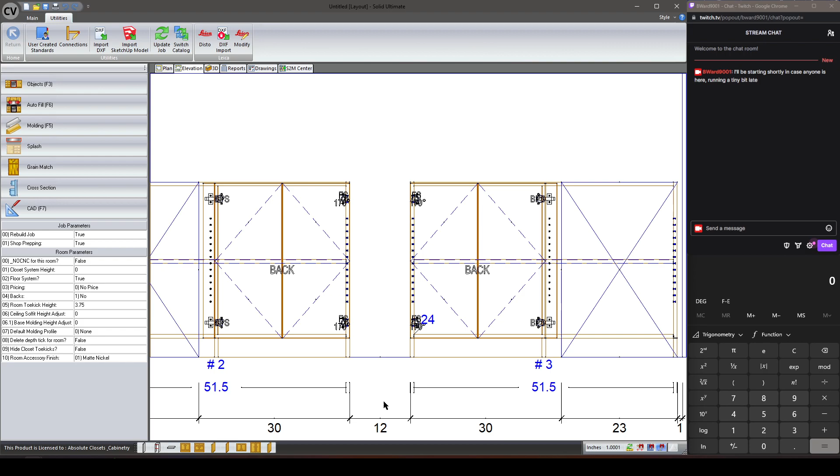The point is that specifically with these cabinets, there are different hinges that need to be used, and in our case, what you're seeing here is a left and a right extended end cabinet. I'm not going to go into how I've built mine. Everybody builds theirs differently, so far as I can tell, which is probably why generally the community seems dissatisfied with what you can get from the assembly wizard or construction wizard questions.

And it seems like everybody needs to modify these in some way to get them to work correctly, and what I have is no different. But I don't want to focus on that for this video because everybody does this so differently. If you have any questions about how I've done this, or want to build your blind cabinets like I build mine, send me a message. I'm more than happy to help. I just don't know that doing a video on the exact way I've built them will be valuable to most people. So anyhow...

This is probably going to be a two-part stream. This one, I think I'm going to focus primarily on how to change the hinges and my process. And the next one, I'm going to probably talk about these kind of hinge annotations that I've got, why I have them, and how you can add them if you want to. I'll go through the process I use to add them.

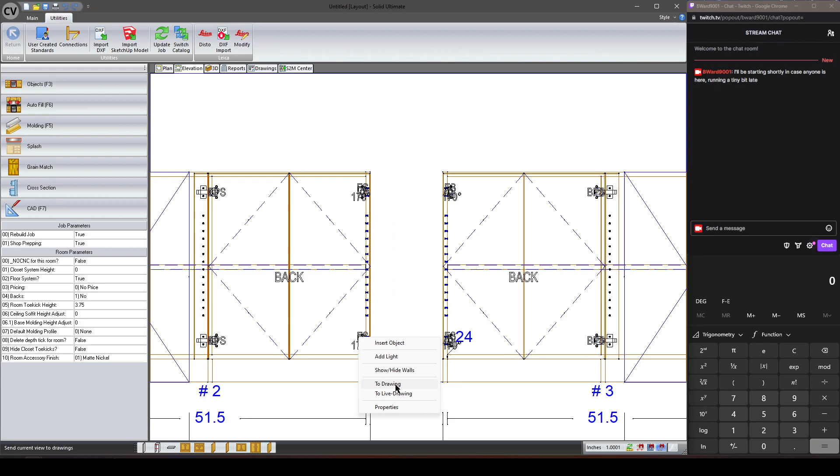But because of the way that we operate specifically, our installers or our assemblers, depending on the situation, have requested that our drawings actually display at each hinge location the specific type of hinge.

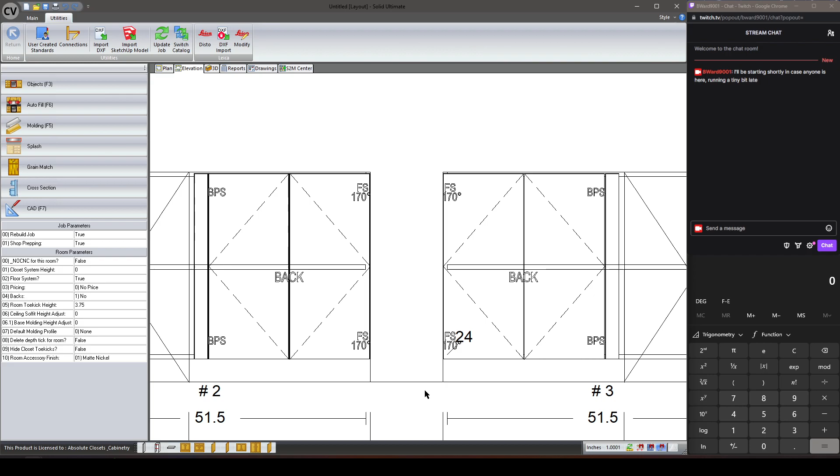Now, whether you agree with this or think this is the best way to go about it doesn't really matter, that's not the point. I would do this differently if it was my shop, but it's not. Because I have to work within the constraints that exist for me, this is a request that was made, and this is my solution. I'd be very surprised if my organization is the only place that requests this type of information.

So anyway, we're not going to talk about the annotations today. We're going to talk about how I've got my hinges changing. Just to show you, this BPS really just stands for blind panel soft close. And then FS 170 is for full overlay soft close 170 degrees.

So when we do our blind corner cabinets and it's a pair of doors, we want the left door on a left extended end or left blind corner cabinet to be the blind panel hinge. And then we want the right door in that pair to open up and swing completely out of the way, because these cabinets are already fairly difficult to utilize. So if you've got one where you're requesting a pair of doors, this right door really needs to get out of the way for there to be any real functionality, or for you to be able to get into it without fighting and eventually damaging your hinges and doors on the right.

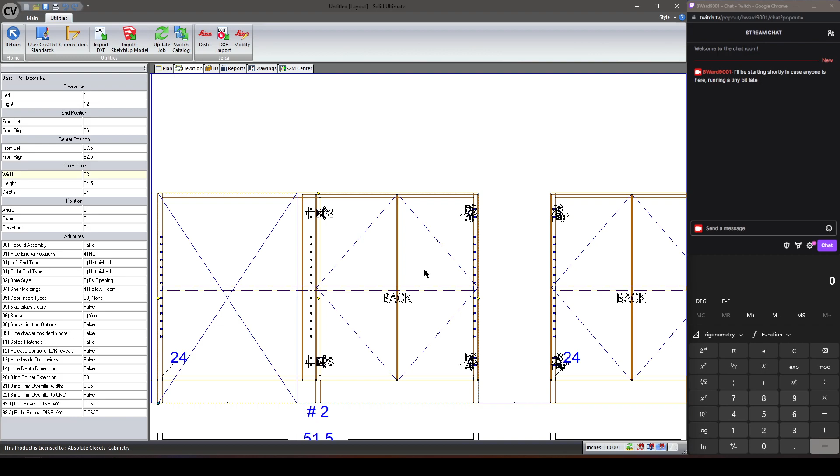So what I want to show is the fact that my hinges for these doors are set to our standard full overlay soft close hinges with standard plates. But I think you'll see it. You can see here in our reports—ignore my massive door pull number if you don't mind—you can see right here that we are actually reporting 170-degree full overlay soft close hinges. Well, the annotation at least is calling it out.

And then the blind panel—these are just called hinge, but when they do report on the reports, they're going to be our blind panel hinge and our 170-degree hinge. So what today's stream is going to be about is how did I manage to do this while leaving this as a pair of doors.

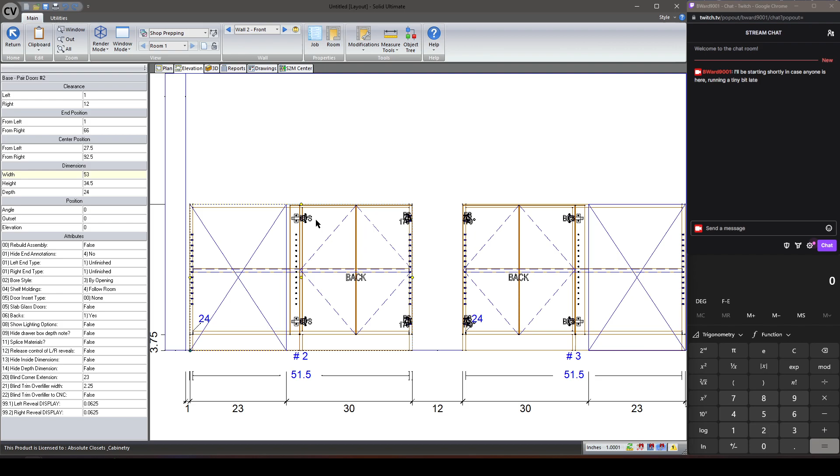And you'll notice, again, it's the blind panel on the left, 170 on the right with the left extended end. And over here with the right extended end, we've got the 170s on the left and the blind panels on the right with a pair of doors again.

Notice if I switch this from a pair of doors to a single door, which if anybody were to build this cabinet, they'd probably get a talking to. But you can see as I switch the hinge side, it does automatically pick the blind panel hinge for the right, the 170-degree for the left when it's a single door, and again, when you go to pair, it's the blind panel on the right and the 170 on the left, depending on your specific condition.

So, I have built a document, and I'm going to provide this. I'm trying to provide a more complete package when I do these videos so that anybody watching will hopefully have a better chance of repeating what I'm showing if they'd like to, or just have a reference to go along with it. And I don't really have a great way today of sharing this, but I'm working on it.

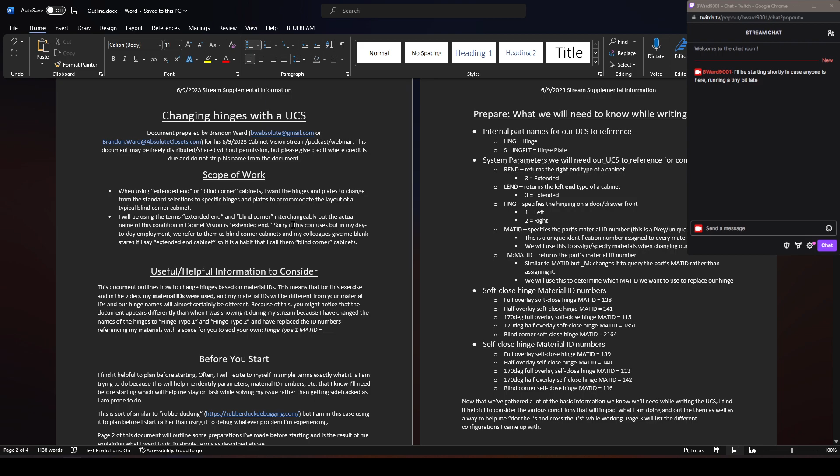So this first page is just some high-level stuff, right? What are we doing? The scope of work. When we're using an extended end or blind corner cabinets, we want the hinges and plates to change from the standard selections to specific hinges for the application.

By the way, I will be using the terms extended end and blind corner interchangeably. Cabinet Vision calls these extended end cabinets. Most of the people I encounter in real life call them blind corner cabinets. So I will be using the terms interchangeably, and I'm sorry if that's confusing. It's just one of those things. So anyhow,

this next section is almost like a disclaimer. As we work through this, we're going to be referencing my system's material ID numbers, and my system's material ID numbers are not going to be the same as yours. So what is important to consider as you watch this video, if you're attempting something similar, is that you need to get your own material IDs from your material manager within Cabinet Vision.

Just because my full overlay soft close hinge material ID is 138 doesn't mean that yours will be that. And you're not going to call it full overlay soft close hinge, I'm sure. You'll probably call it something different based on the needs of your organization. For my workplace, they wanted the report to say full overlay soft close hinge, so that's what it says. But yours might be the actual product number, or whatever you use to refer to your products internally.

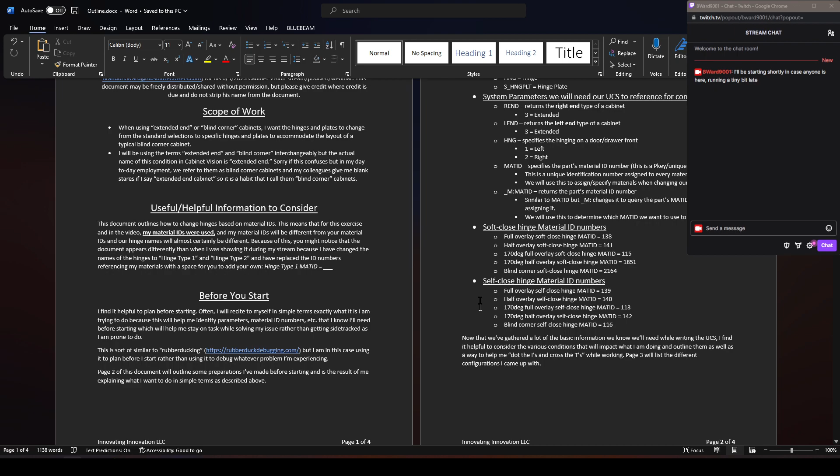So now that I've gathered all of this basic information, I find it's helpful to consider the various conditions that will impact what I'm doing. What are the possible configurations or conditions to consider when I'm writing this UCS?

I know that I'm going to have left and right extended ends, and then conditions where there's a pair of doors or just a left door only on my left extended ends. My right extended ends will have a pair of doors, which will be left and right doors, and then I will have a right door only condition as well.

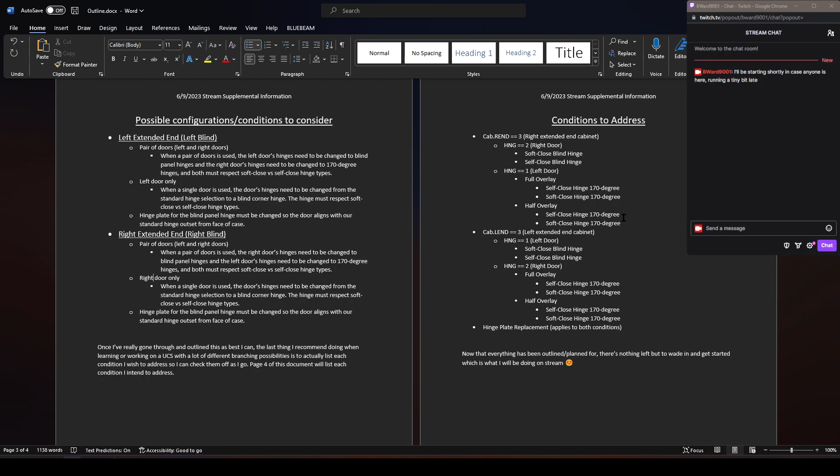So now that I've outlined this, the last thing I recommend doing when learning or working on UCS with different branching possibilities is to list each condition to create a checklist. These would be the different conditions that I know I need to address. I'll keep this on my other screen while working through to make sure I'm checking off each of these things, and hopefully at the end I will not have any debugging to do, having gotten every last thing taken care of on the first go round.

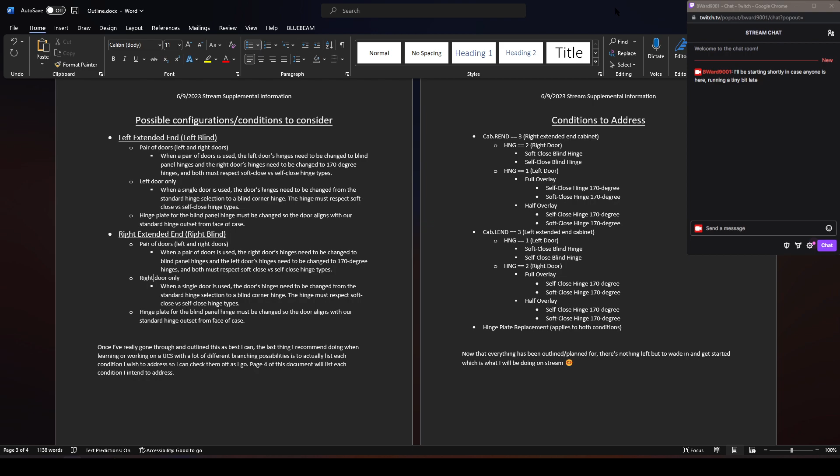So I'll provide this document. I'm going to be changing it as I wrote up here, if you happened to read it. I'll be taking away all of these material ID numbers when I share it and replacing them with underscores as a placeholder to let you know you need to put your own material IDs in there. And then I'll just be calling this hinge 1, hinge 2, hinge 3, blah, blah, blah. So it'll be a little different if you download this on your own.

But for the video, I've already gone through and populated all of this information beforehand so that I can easily reference it while we're working, and you don't have to wait on me to do any of that. I'm just setting this up on my other screen real quick so I can see it and monitor chat and everything, and then we will jump right in.

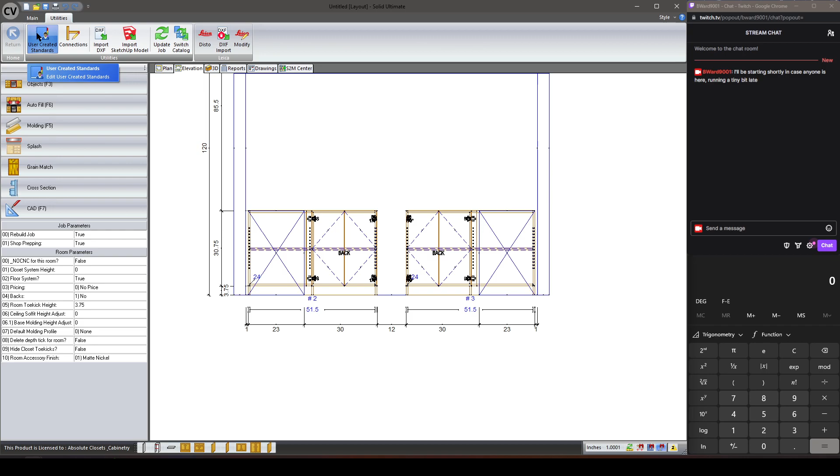So I'm going to go in and turn off the UCS that I've already built that does this, and we're going to step through what will need to happen for this. So I've got a UCS set up, and as I've tried to suggest time and time again, I do have a filter kind of in place.

But I don't want to have this as a cabinet level attribute. I want to set this up on my job so that my job will just allow me to test or not. So I've got this test statement, and before I go further - because I am guilty of doing this quite often - I'm going to make sure I go and add this attribute to my job, and make sure I've got this UCS turned on.

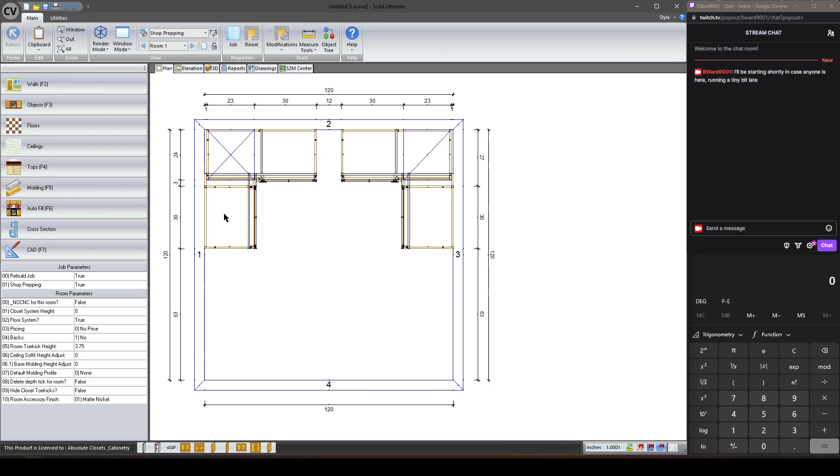And I'm actually just going to delete everything as well, so that we're just starting from scratch. So to add that parameter or attribute that is going to let you test, this would be how you would add it. And the description doesn't matter. This can be whatever you want. I just normally, for simplicity, paste the actual name of the parameter in here and then put a colon after it. Setting it as an attribute will make it appear on the left-hand side of your room. Because it's a job property, it'll appear up here under the job parameters section rather than room parameters.

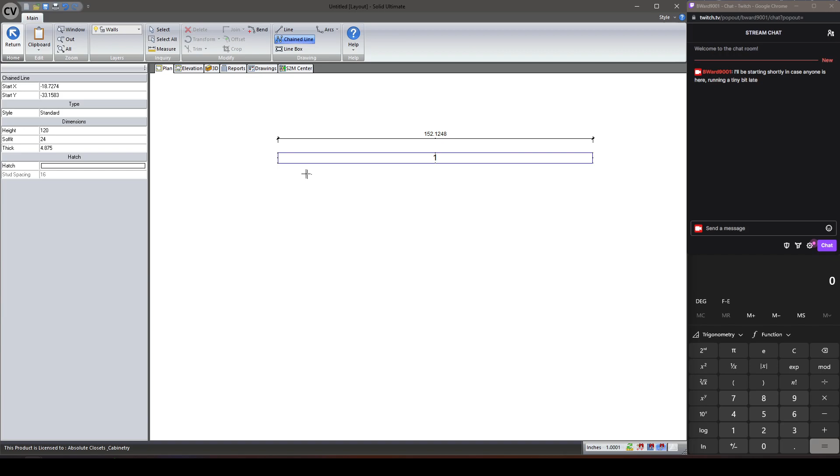Excuse me. And I think I might have said this already, but Boolean is just true/false in case you're unaware, right? So 1 is true and 0 is false. So I'm basically saying the value of ACC test UCS is true or 1. When I do this, you'll see it show up over here, and it's true. So that's going to allow my UCS to make it past that exit filter without affecting, if you happen to be on a network, anybody else and what they're doing, or without breaking your other cabinets in your job.

Being a little bit lazy with my wall numbers, so I'm trying to just even them up a little bit real quick. All right.

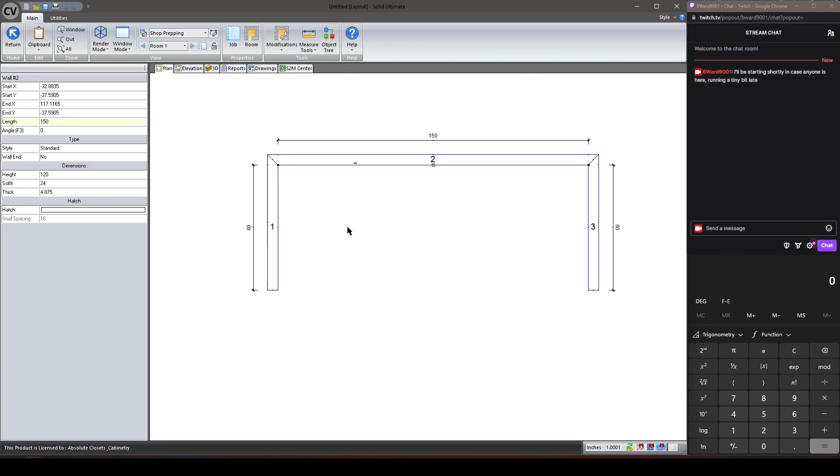So where do we start, right? I've got my list of all of my different Hinge IDs, and essentially what we're trying to say is when we've got a certain condition, we want the hinges to change. Because Cabinet Vision's test environment is really just whatever job you're in, I think it's valuable to create the conditions you're trying to test while or before you start writing your code. It doesn't have to be blind or extended end cabinets. It can be whatever you want. But I find that it's helpful to set the situation up.

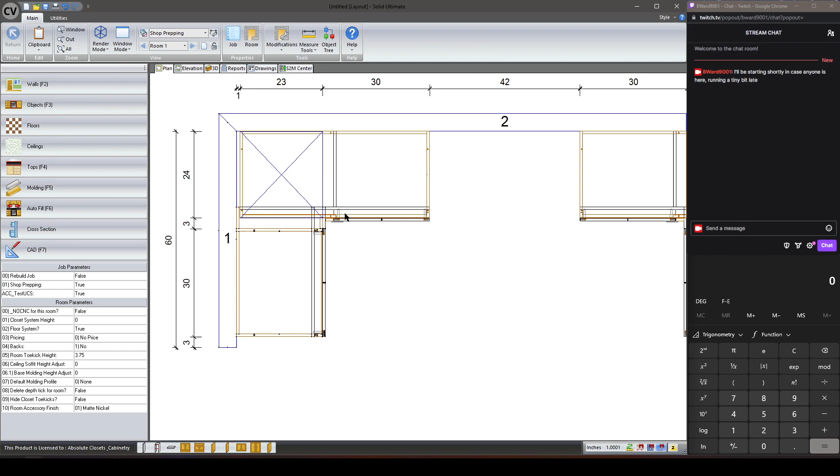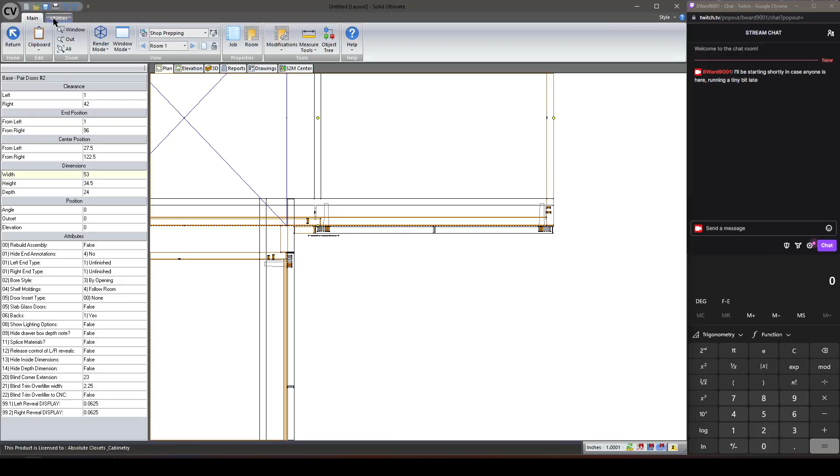So I've put my cabinets in here, I've extended the ends, and they're set up correctly, but the hinges are wrong. And you'll notice I have a different UCS in here that is intended to help our team pick the right hinges. There's a stop sign over the hinge because this hinge is wrong. But to simplify this, I'm going to find my hinge warning UCS wherever it is in this mess and shut it off. Bear with me. I should have done this before I started. All right, so I've got my hinge type warnings turned off, and that'll make this a little less confusing for everyone.

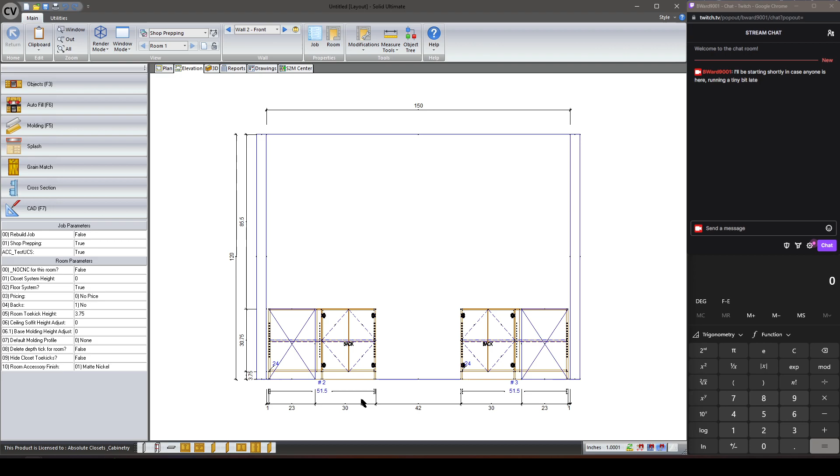So right now, my hinges are calling out full overlay soft close because that's what the cabinet is set to. I know that I want these blind panel hinges on the left and these to be 170-degree full overlay on the right. So the UCS that I am going to be writing is going to be for each hinge and hinge plate part. I showed earlier in my document that the internal part names I'm going to need are HNG for hinge and S_HNGPLT for hinge plate. As is the case with every UCS, your for each line needs to call out the parts that this UCS is going to work on.

And then immediately after I have these parts called out, I have my exit, because it's best practice for performance, and it's also to prevent unintended things from happening. So I want to talk for a minute about what I've done to prepare. I'm going to show you the hinge model that I've created for my blind panel hinge, because that's going to help explain what I'm doing with my hinge plates later.

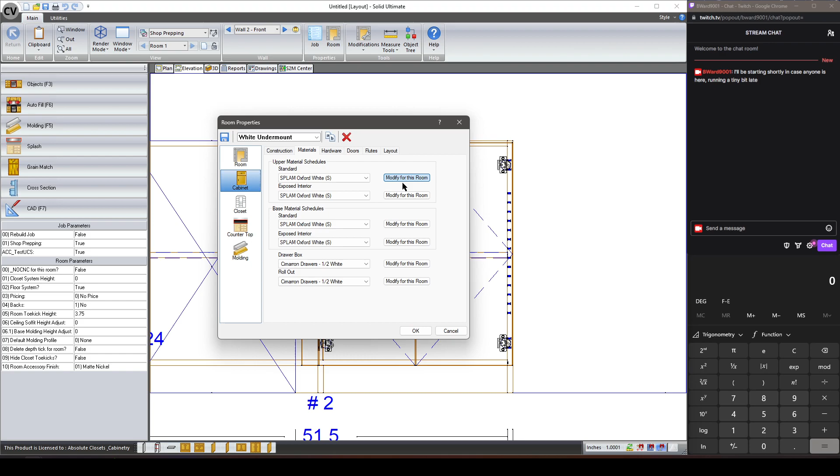So if you're not familiar, you can actually access your material manager while you're still in a job, which is frankly a pretty nice thing that they've done. So thank you, Cabinet Vision people. I know that I'm kind of, well, let's not get into that. Thank you, Cabinet Vision. This is a really great improvement.

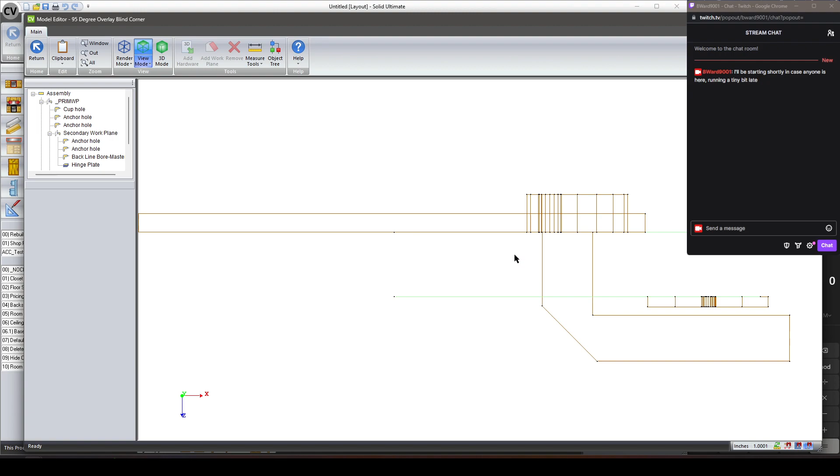So if we look at my blind corner hinge, I found that it was easier for me when I was building this to just have my hinge plate included right here with my hinge.

So this is not the way that hinges typically work in Cabinet Vision at this point. They're separate objects. You've got a hinge and a hinge plate, because you can have one hinge plate and use many different hinges on it depending on the manufacturer. I think that was a wise decision to separate the two.

But for what I was trying to do here, I thought it would be easiest for me to just include the hinge plate and the holes, really, that are going to be applied to the panel from the hinge plate right here in the model, just to make it easier for me to build it all together.

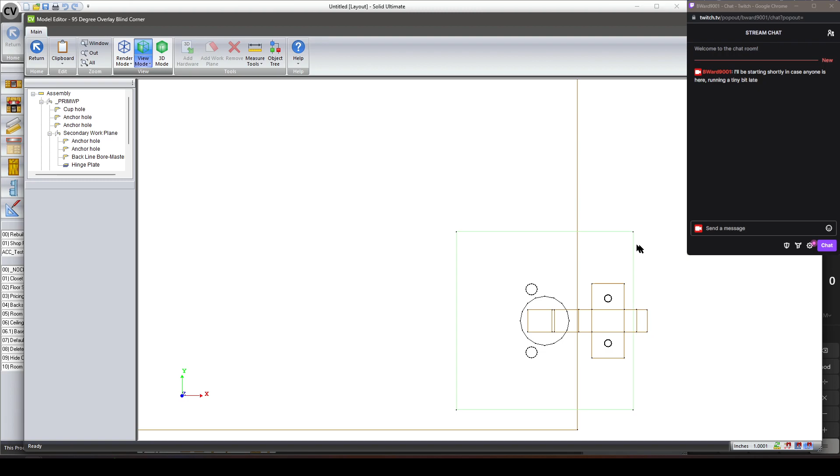So my UCS is going to be, in this particular condition, actually targeting the hinge plate that should be going with the blind panel hinge and setting the quantity to 0, if I'm not mistaken, and then I'll be dimming a hidden hinge plate for my report as well. So this one is just for visual representation. It doesn't actually report, but I think that this will help as we go through the way I've written this, to kind of make things make a little more sense.

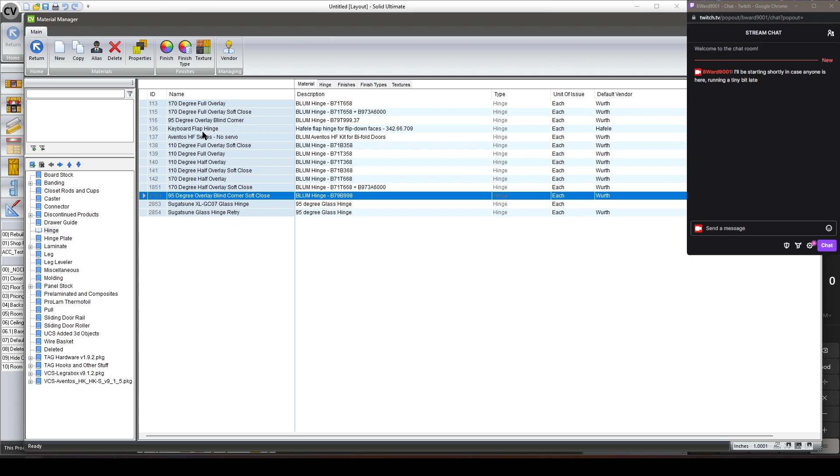So my blind overlay, my blind corner 95-degree hinge and my blind corner soft close 95-degree overlay hinges both have that same sort of thing going on with them. They've got the hinge plate included with the model.

So back to the user created standards, right? There's a lot of different ways that you can do this, but for this one, the way I thought about it was basically saying, let's take care of all of the extended left ends first, and then we'll take care of all of the extended right end conditions second. Or maybe I did right then left first. I don't really recall.

But the first thing I want to do is, because I have identified two different parts, hinge and hinge plate, but I'm only trying to change the hinge, I need to make sure that I work basically only on the hinges. So if this name equals hng, then, and the use of this, if you're unfamiliar with it, is basically just a way to say don't look up the object tree. Only look within this limited scope.

It's generally a good practice. It will help you be more specific about what you're trying to write your UCS for, and prevent any weird things from happening by accidentally climbing the object tree and finding a different hinge somewhere, or different whatever, right? So I've isolated that I'm only going to be working on the hinges, and at this point I need to check for what my cabinet end condition is.

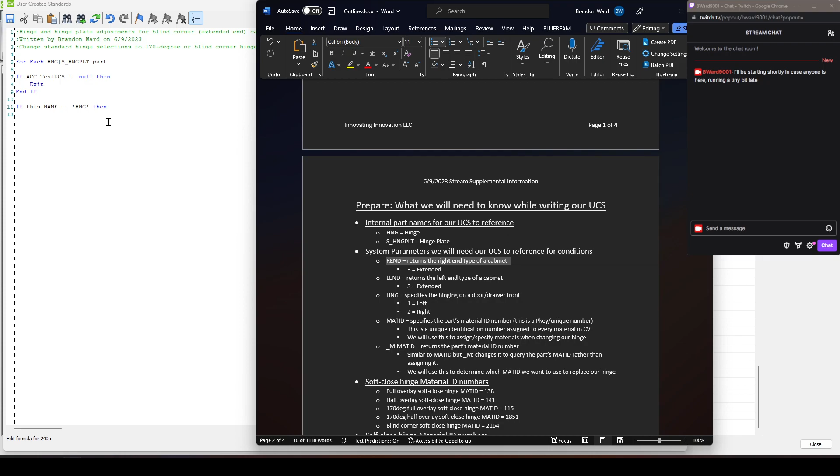So I'm going to start with my right extended ends, and if you recall from earlier, the system parameter for the right end is rend, and if it has a value of 3, then it is an extended right end cabinet. So again, it's very simple. It's a straightforward if-then condition. If the cabinet's right end is 3, then we know it's a right extended end. So at this point, we know we're working on a hinge, and we know we're working on a cabinet that's got a right extended end.

We need to now check to see, is it hinging left or is it hinging right? Now, a lot of times when you're writing stuff for hinges or doors or anything in general, it's actually important to check to see, are you working on a pair of doors or a single door? In this particular case, it doesn't actually matter, because the hinge doesn't care. All it really cares about is if the door's HNG parameter is 1 or 2.

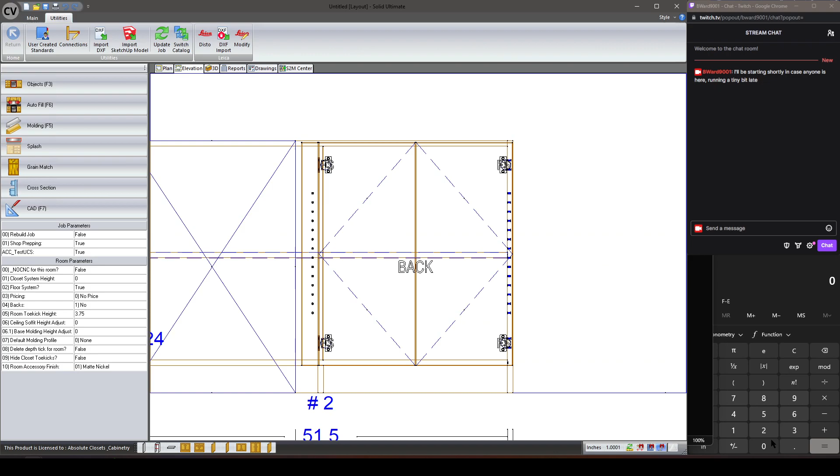And I will actually jump out of this real quick to show a little more of what I'm meaning. And yes, there's an error, I know. I didn't really finish my UCS at all there, but I'm trying to just show, not that one.

So the hinge, right? The hinge doesn't actually care if it's a pair of doors or not. All the hinge really cares about is, I think it's for door open actually, what is the HNG value of the door open? So on this particular one, it's 1. And this particular one over here, it's 2. So the door open, which is up the object tree a little bit from the hinge, is actually going to tell the hinge whether it's a left or right hinge, so we don't need to know whether it's a pair door or a single door.

At this point, we don't need to check the S type of the doors to see if it's a pair or not. All we really care about is what is the hinging.

If HNG is equal to 2. This could actually be written a couple of different ways. We could specify the exact path, like if door open.door open.hinge is equal to 2, and it would climb up the object tree to the door opening. Or we could put if colon HNG is equal to 2 then, and it would climb its way up the object tree as well.

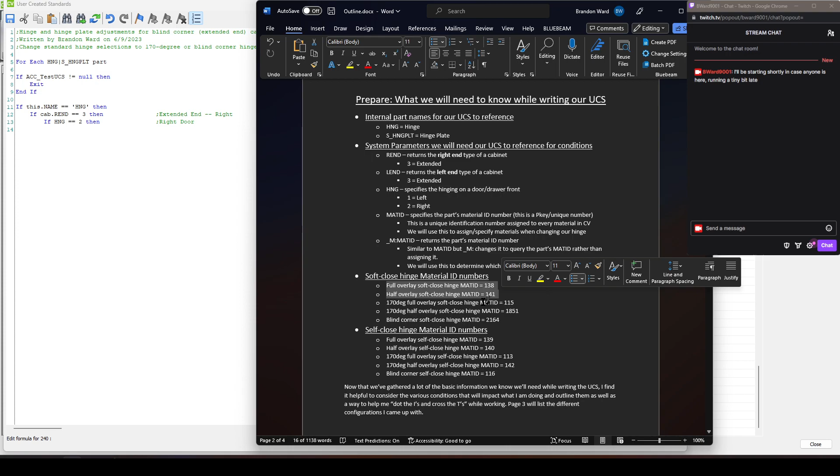So my soft close hinge material ID numbers, these two right here, because I know I don't have it set to 170-degree hinges, and I know I don't have it set to blind corner hinges, I've got it set to be full overlay soft close for my cabinet, or half overlay soft close for my cabinet. So if the material ID of the hinge is either 138 or 141, I know my hinge material schedule has been set to one of my soft close schedules, and so I want to change the hinge's material ID to be my soft close blind corner hinge's material ID.

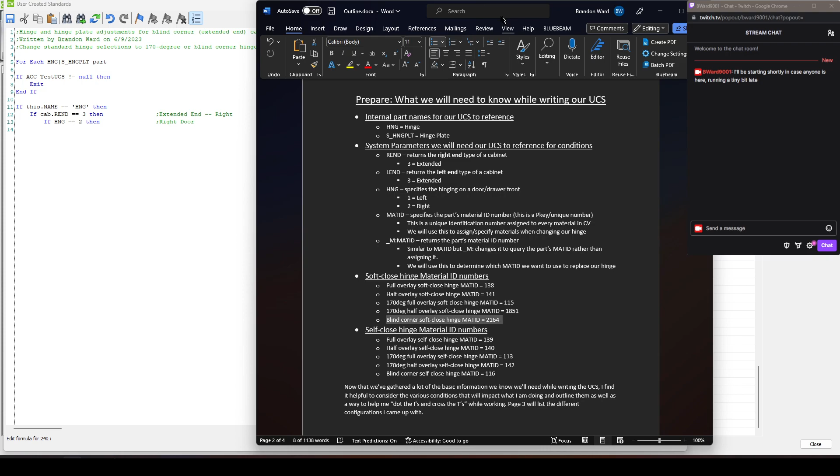So if it's 138 or 141 - and this is where we're going to use the _M:MATID to query the materials, really the part's material ID, rather than assigning the material ID to it. So this is basically saying, if this material ID is equal to 138, or - which is that vertical pipe thing, it can also just be written as or - this material ID equals 141, then it's one of my soft close hinge schedules.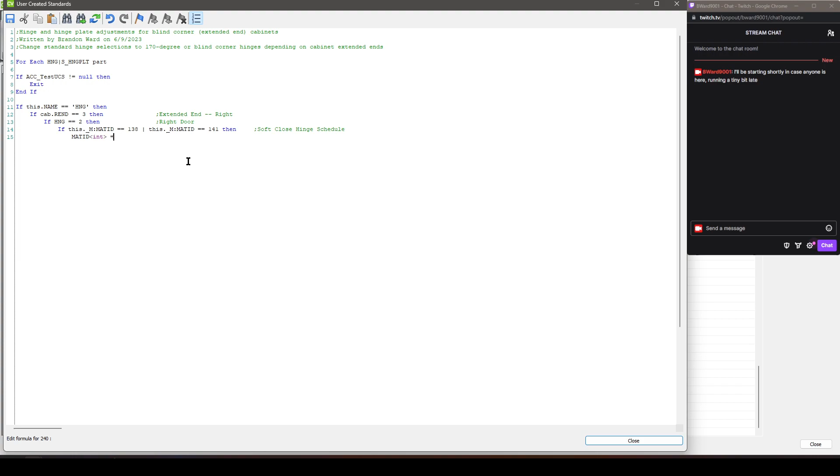And I know I'm going to change my material ID to my blind corner soft close hinge material ID, which is 2164.

Because I know that I only have a self and a soft closing blind corner hinge, I don't need to query for any other material IDs on this hinge, because if it's not a soft close hinge schedule, then it's going to be just a regular self close hinge schedule. So I will use else here and define it as my regular self-closing blind panel hinge, which right here is blind corner self-close hinge material ID of 116.

And if - I don't have any other conditions for a right door, or any other conditions I really care about checking for a right door on a right extended end assembly. So I will end that if as well.

So we do want to address the left door, though, of the right extended end cabinet. We're not going to end the if where we're checking to see if it's a right end yet. We're just going to start another if, hinge equals 1.

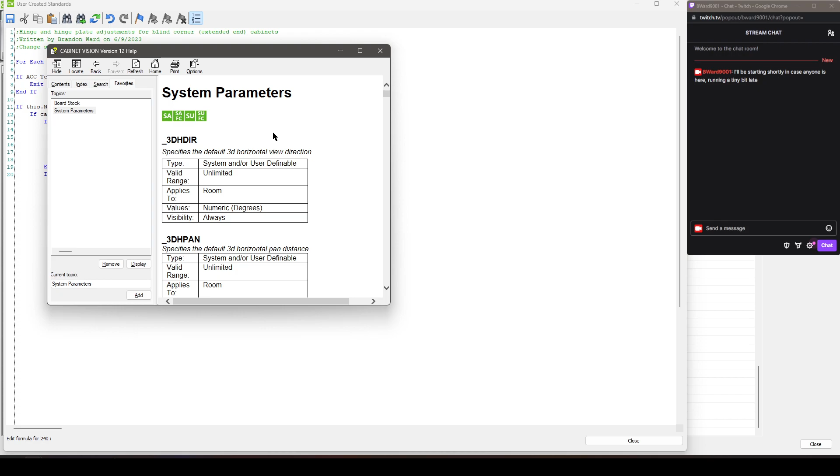Matching case is good, and matching the whole word is going to prevent hits like this from showing up. But hinge still appears fairly often, so you're going to have to click next a few different times to get to it.

HNG specifies the hinging on a door or drawer, and these are the different values it can typically be: 0 would mean there's no hinging, 1 would be left, 2 would be right, 3 would be top, and 4 would be bottom.

Here's some information about drawer opens, like having a tilt down or whatever, but that's not really important to us right now. We're really only focused on 1 is the left hinge and 2 is the right hinge. So anyway, right is 2, right door; left is 1, left door.

So if we're working with a left door of a right extended end cabinet, this is where we want to start switching our hinge to be one of our various different 170-degree hinges. And I have 4 different possible 170-degree hinges to consider.

I've got my full overlay soft close, my full overlay self close, my half overlay soft close, my half overlay self close. Those 4 different possibilities could be used for this hinge depending on what the user of the software is doing at this time.

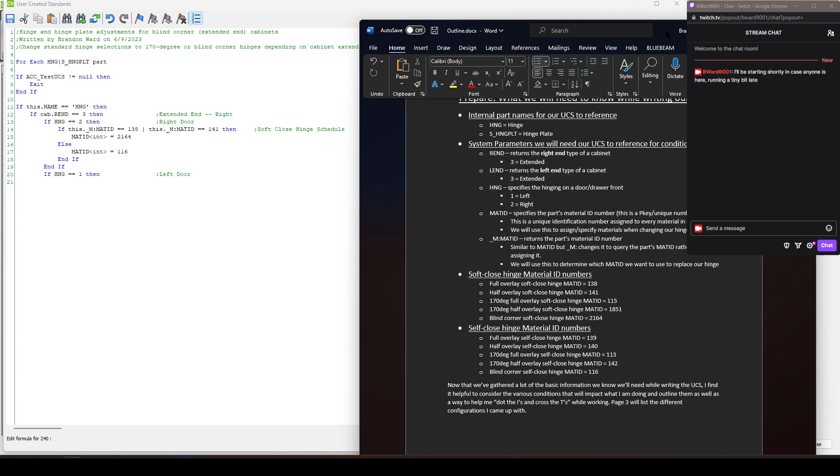So the different conditions I need to check for: 138 is my full overlay soft close hinge. So if it's my full overlay soft close hinge, again referencing, if I'm a full overlay soft close hinge, then I want to switch to my full overlay soft close 170-degree hinge, which is a material ID of 115.

So at this point I could do end if, and then if this dot underscore mat ID equals the next one, and we'd end up with this nested cascading if-then-else condition, and there's nothing wrong with that. But to just keep this simple and easy to read, I'm going to do if-then, and if, over and over.

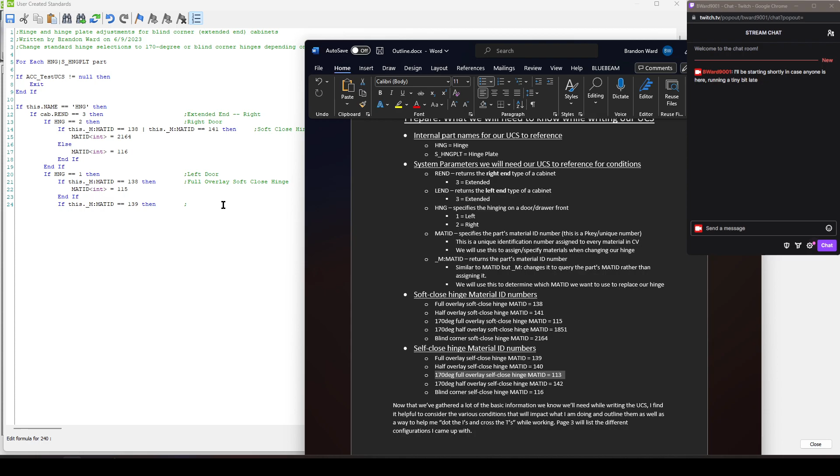So 139 is my full overlay self-close hinge, and I know when I have a full overlay self-close hinge, I want to switch to a full overlay self-close 170-degree hinge. Sorry if this seems obvious, I'm just trying to be thorough. That material ID, again, is 113.

So on and so forth. The next one I'm going to check for is 141, which will be my half overlay soft close. 1851 is my 170-degree half overlay soft close hinge.

And the last one I'm going to check for is 140, which is my half overlay self close hinge. My material ID for my 170-degree half overlay self close hinge is 142.

Now it would be best practice, I would say, to comment the hinge that you're switching it to as well. I didn't, so I'll go through real quick here and do it.

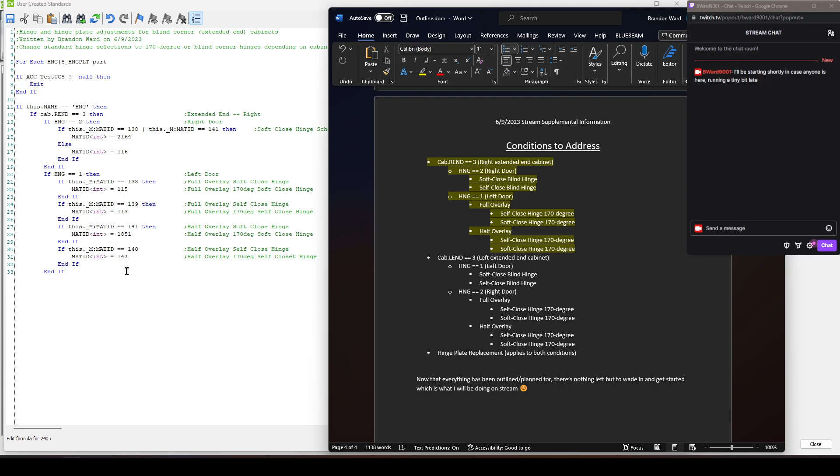So this would be, again, just my way of kind of like checking off the boxes as I work my way through my UCS to make sure that I dot all the I's and cross all the T's. At this point, if you are familiar enough with UCS that you don't need practice writing them, I would copy this entire block, paste it again down here, and then go line by line and change them.

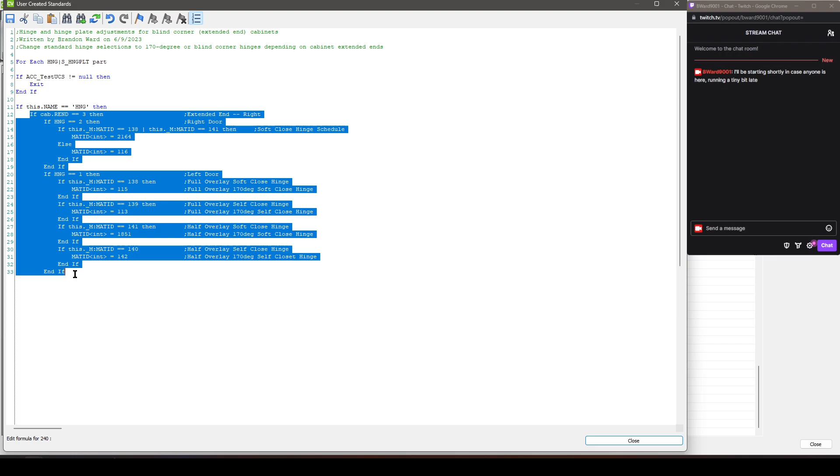If you don't happen to be super familiar with writing UCS, that's probably going to get you into trouble. I think you'll probably run into situations where you miss changing something, or you transpose some numbers, or you make a typo or whatever. So you also don't really get any practice by doing that necessarily.

So if you're trying to learn, I would write out the entire next section of this as well. If you're comfortable and familiar, copy pasting will save you time. So we've finished all of our conditions for our extended right end. So we need to have an end if that closes that sort of opening if.

At this point, we now need to check to see if the cabinet's left end is 3.

Keep the formatting as identical as I can. So at this point, this is where I say that if you wanted to copy and paste it, you could, and you'd probably do fairly well, but I think it's better to write it again. So in this particular case, we had an extended right end with a right door first.

And if you'll remember, as you think about the layout of an extended right end cabinet or a right blind corner cabinet, you want the right door of your opening to be your blind panel hinge. On a left extended end cabinet, this would be your left door that you want it to be the blind panel hinge, not your right door. So instead of checking for if hinge equals 2, like we did up here on line 13 for the right door, we're going to check to see if hinge equals 1 for the left door of our left extended end assembly.

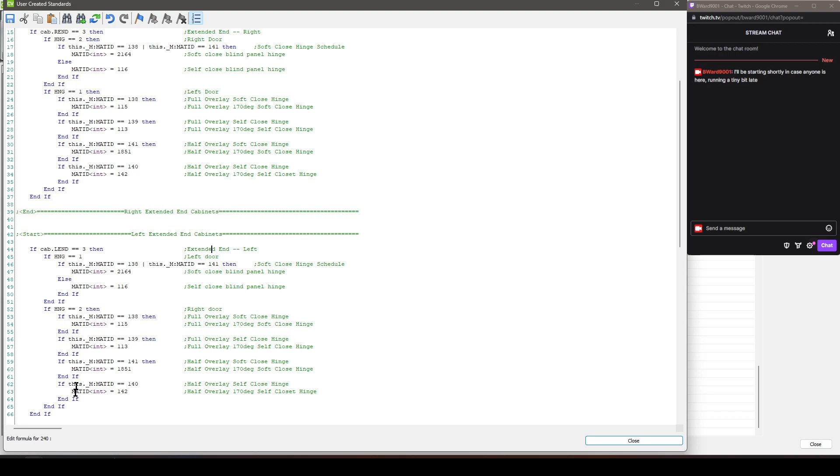So we're going to close this if hinge equals 2, and then we're also going to close this if cabinet.lend equals 3, for an extended left end. At this point, we've addressed the hinges for our extended right end and the hinges for our extended left end. We haven't really tested anything at all, so I'm going to jump out of this and take a look. But before I do that, I need to close this 'if this.name is equal to hinge then'.

When you've got an End If that's way down here and it's hard to tell what it's actually associated with, a lot of times it can be helpful to include what the if was for up above, just to help you find things. Everything you can do to track what you did in the past when looking at your code later is helpful. It's why we do the indentation, it's why I've segmented this. You're not going to remember 6 months from now what you did, so leave yourself these notes. It's really helpful. These are even kind of weak notes honestly - they're not bad, they're kind of weak. This could be done much better, but it's good enough for what I'm doing here.

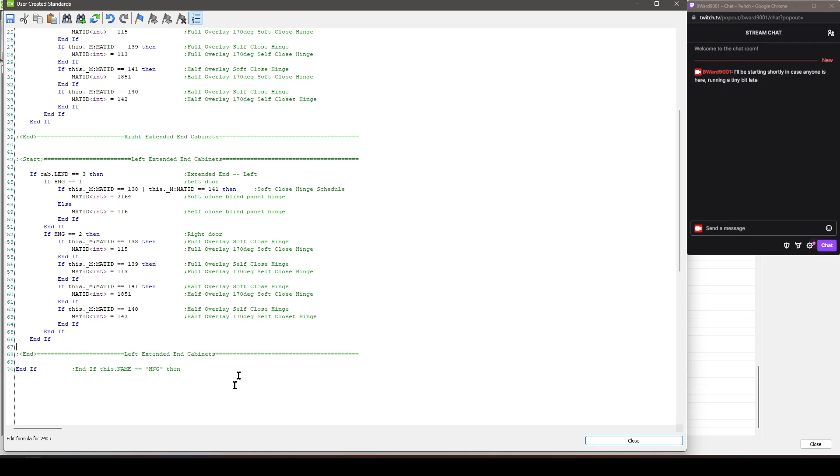At this point, I'm going to jump out and test to make sure we don't have any errors. Got an error, line 33 - it expected 'then' in an if condition. So shame on me. Not every programming language requires a 'then'.

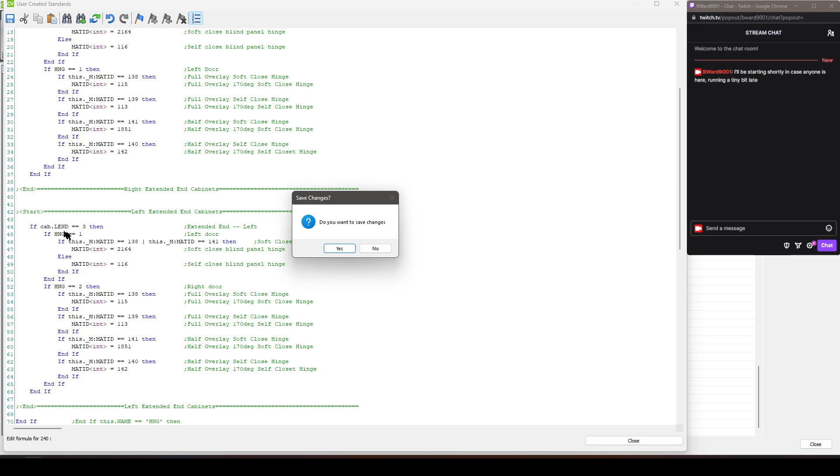Because I copied this, I'm going to have it down here also. As I've mentioned in the past, when you get those error messages, don't just click them. I'm going to have another error right here - I'm seeing it right now, actually. So I'm not even going to go back to the job yet because I did see I was missing this 'then'. Anyway, when you get the error messages, don't just click OK. Read them, understand them. It will help.

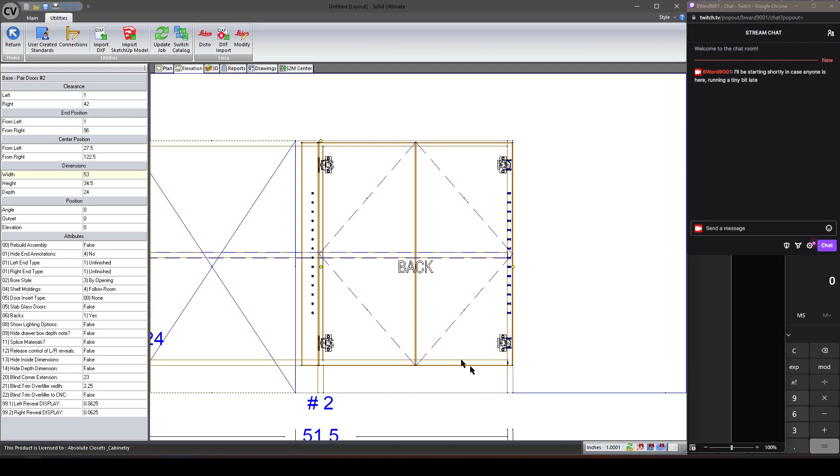At this point, I'm not getting any errors. I'm getting my full overlay soft close hinge annotation. But I'm not really able to see what my hinges are here, so it's kind of hard for me to know whether or not it's working correctly. Truthfully, I kind of expected a little bit more than that. Let's take a look at this and see.

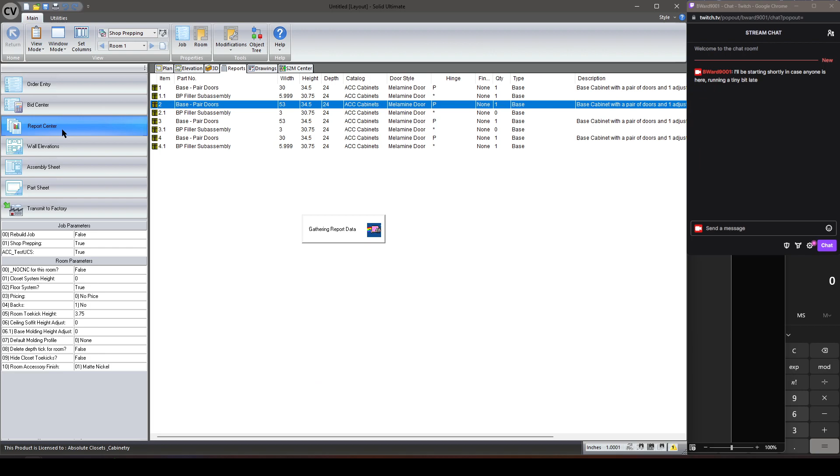Honestly, I think I'm just going to jump to my reports because I think that will be the easiest way for me to tell. Although I have so many cabinets in here, it's actually going to be maybe a little bit difficult to see.

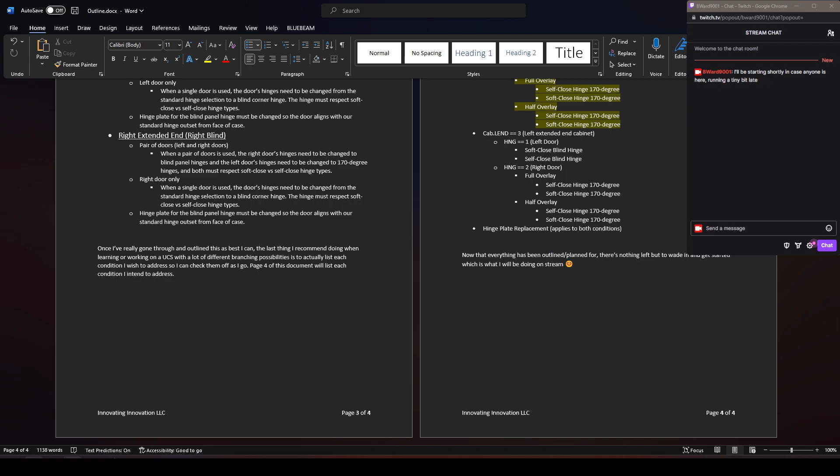Okay, really, really slow reports today. Wow, I'm wondering if for some reason my software is crashing. All right, well, I'm just going to force close this. Try again.

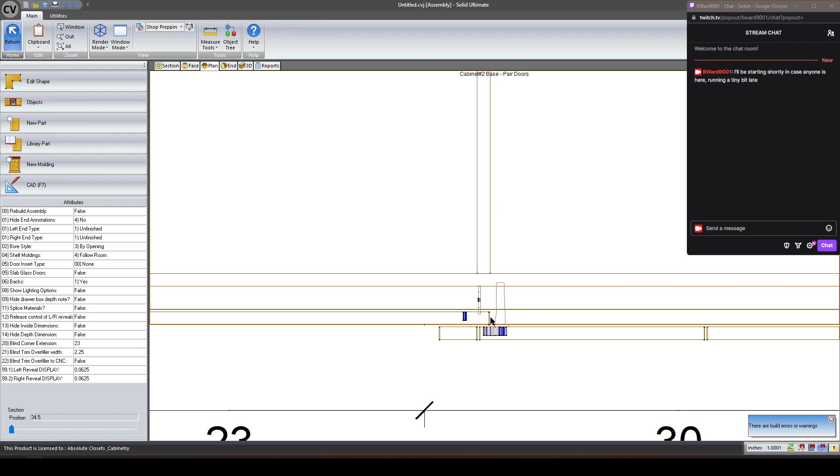All right, my ACC test UCS is on. No? Let's see here. I know for sure actually this is not working as intended right now for some reason. I kind of need to dig into this and check. Ah, that would be why, right there. What do you know - my exit was the opposite of what it needed to be.

There we go. All right, so I'm getting the correct hinge showing up here now, and I'm wondering if my annotation will change later. But what we can see here is that the hinges are switching themselves around correctly. And I'm going to try to go back to the report center here to see if we can actually see that the hinges have changed.

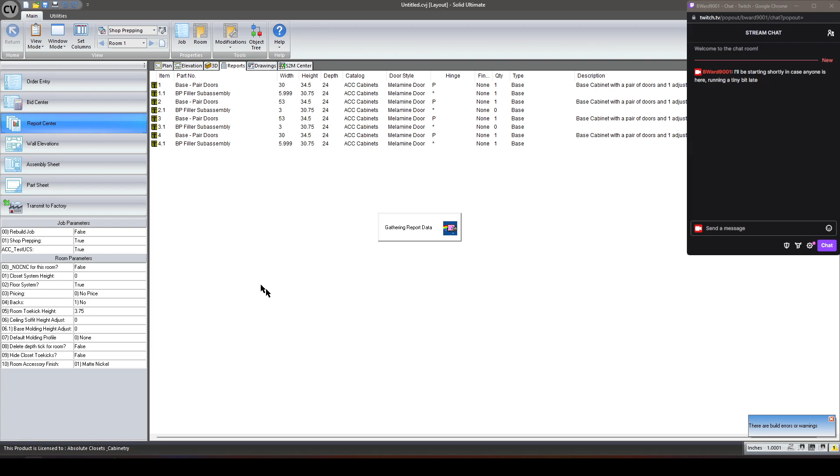My reports today are just not doing well. Let's see if we get a report.

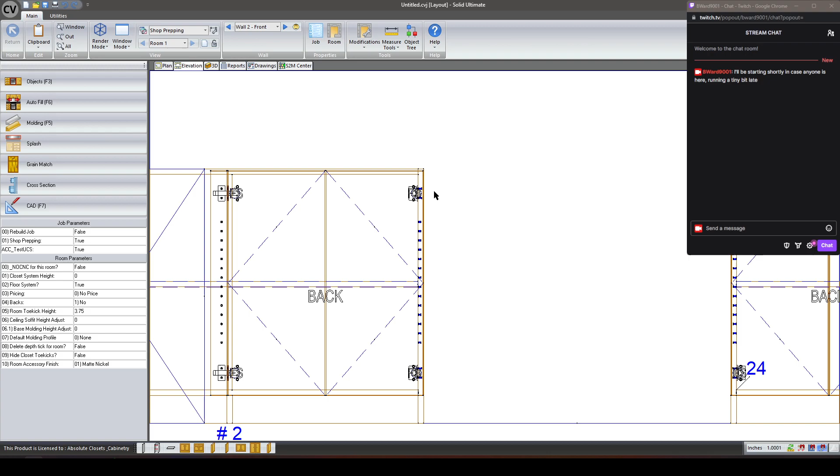All right, so it is working, as you can see. We've got 4 of these 170-degree full overlay soft close hinges. We've got 4 of these 95-degree overlay blind corner soft close hinges. And then we've got 8 regular full overlay soft close hinges. So that would be 1, 2, 3, 4 of the regular ones.

And then for these other cabinets, we've got some other hinges that are reporting. Sorry, that's 4 for this cabinet that are the standard full overlay, 4 for this cabinet that are standard full overlay. There's 2 170s on this end, 2 170s on this one, and then 2 blind on this section here, and 2 blind on this section here. So that checks out.

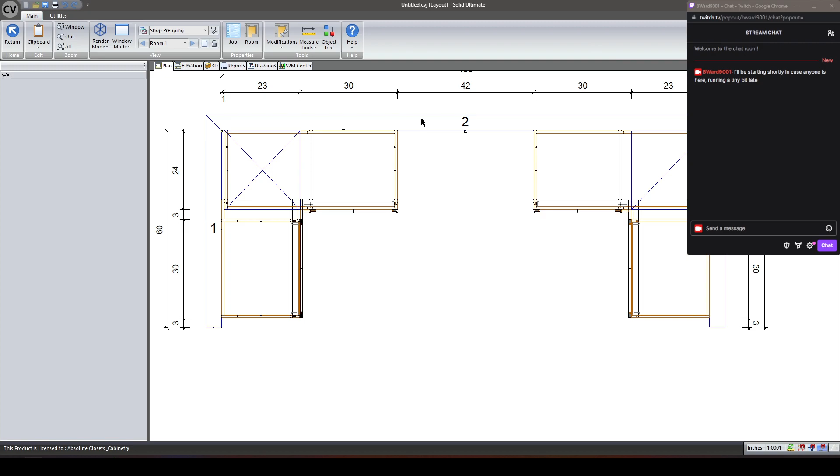At this point, the hinges are correct, but my hinge plates will not be reporting correctly. To swap the hinge plate out, it's fairly similar. I'm going to go through this fairly quickly because I really try to keep these videos under an hour and we're over. So I'm going to try to just kind of jump through this next little part.

So we're going to start a hinge plate section here. And we're not checking to see if it's hinges any longer. So we don't need to go within this end if. We're actually going to start a new if. So if the name of this is a hinge plate, then what we're going to check to see is what is the hinge's material ID currently.

So the reason this works is earlier in the UCS, and the UCS will always read top to bottom. Earlier in the UCS, we've already changed the hinge. So to simplify this, all I really need to check for is has my hinge been changed to one of the two possible blind corner cabinet hinges? And if it has, then I'm going to set the quantity of my standard hinge plate to 0.

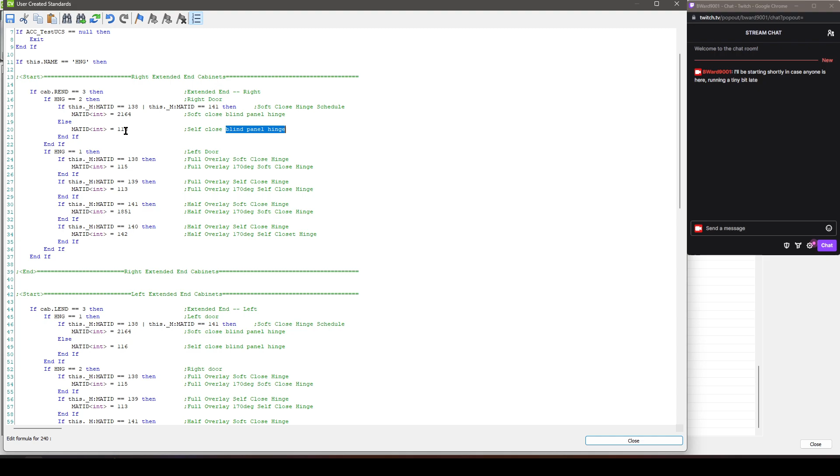So we know up here 2164 and 116 are the two material ID numbers referencing my blind panel hinges. So we can check to see if the material ID of the hinge is 2164 or 116. And if it is, we can set our hinge plate quantity to 0. So referencing this one is a little bit, I don't want to say tricky, but it's different from what we've done because we need to get specific.

Because of the way hinge plates are located in the object tree, we need to climb up the tree and then go down the tree down a different path. So I'm going to comment this out so we don't get an error, and I'm going to just jump into the object tree and try to explain a bit better what I'm talking about.

So as we look at this, we've got the face of our cabinet. We're looking at a door opening, and specifically at a door. Now, what you will notice is, for a door opening, the door object is actually siblings with the hinge plate. So the hinge plates are not a child of the door object. However, hinges are. And if you drill down into hinge, you'll notice that there is no hinge plate. Because again, the hinge plate is actually a sibling of the door object.

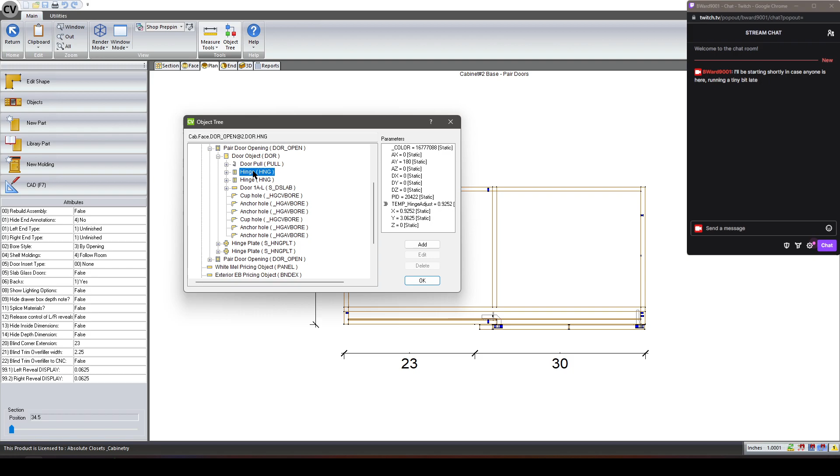So if we're looking at a hinge plate in our user created standard, if this .name is equal to S_HNGPLT, and we want to check the material ID of the hinge, which is a child of a sibling, you need to go up the object tree one level. You don't necessarily have to, but I find it to be easier. Up the object tree one level, then down to an object and reference it, and down again to the next object to reference it. So how do we do that?

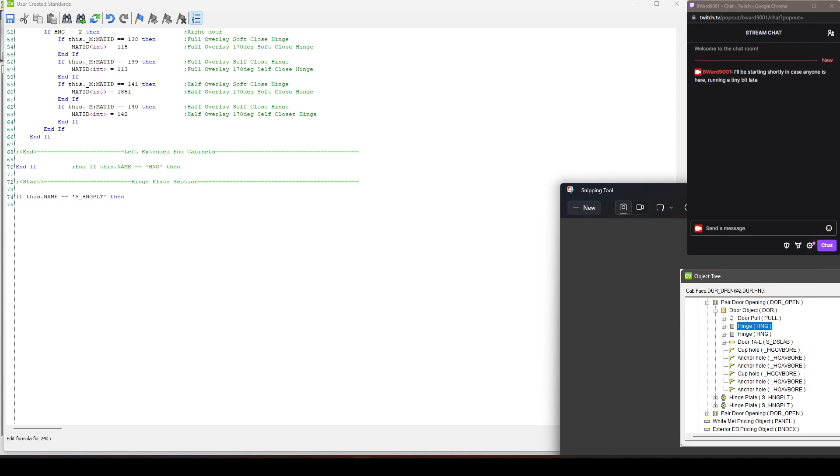First of all, this is one of the times that I feel like it's a very good idea to snip something so that we've got a reference to it. But this is not really gonna be easy for me to show at the same time. But essentially, I'm starting right here. And to go up a level without specifying what level you wish to go to, you use a colon. We've talked about that before.

So I want to go up one level, because I want to go from here to my door open, which is a colon. And then I want to go down a level from the door open to my door. And to go down a level in the object tree, you use a period. So colon period basically says go up a level, then go down a level. But what it allows us to do is specify which level down we want to go to. It allows us to define very clearly the path that we're trying to refer to.

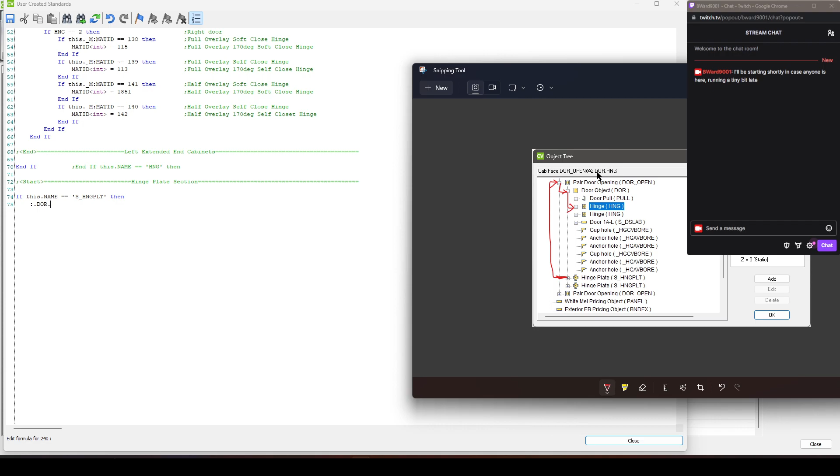So we want to go up, then down a level to the door. We don't want to go down a level to hinge plate or something, so .DOR. And then from there, we want to go down a level to see what hinge that door, which is a sibling of the hinge plate, which are both children of the door opening, is calling out. So if you look up here: .DOR.HNG, .DOR.HNG. And what are we looking for?

We're trying to see what material this hinge currently is made from, because we're trying to see has this hinge been changed from whatever it was before, which we don't care about, to a blind panel hinge. So to check a material ID, we use _M:MATID.

So we're going to check to see, is it 2164 or 116? But I kind of forgot to put the if part. So: if you're a hinge plate and your parent's door's hinge material ID is equal to 2164, or you do the same thing. Instead of checking for 2164, which would be the soft close, we're going to check for 116, which is the self close, because in either case I use the same hinge plate.

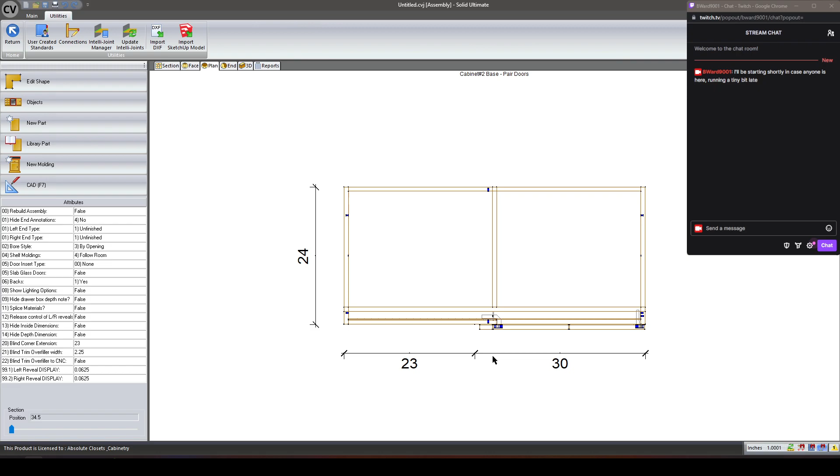I'm going to throw an exit in here before this even runs so that I can explain a bit more with context why I'm doing this. If you'll remember before on my blind corner hinge, I said it was easier for me when I was working with the model, or when I was building this, to just include the hinge plate right on the model to help me better place my operations. So you can see right here, I have my hinge plate that's supposed to be associated with my blind panel hinge displaying and creating operations. The problem is that I still show this other default hinge plate here. That's my standard hinge plate from my other hinge.

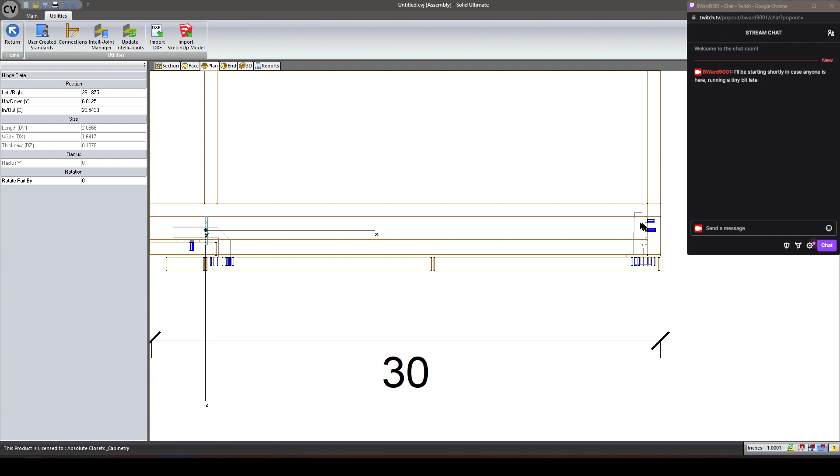And so what I'm trying to do is basically target this hinge plate and tell it: hey, if the hinge that you're actually supposed to be associated with is not the standard hinge you're looking for, or basically if it's a blind corner hinge, then we need you to go away, because you're just cluttering the drawings and you're going to report incorrectly. So that's what this next portion is for.

Right? If the name is hinge plate, then if either of the hinges for the door is either of our blind corner hinge material IDs for self or soft close, then we want you to disappear and not report.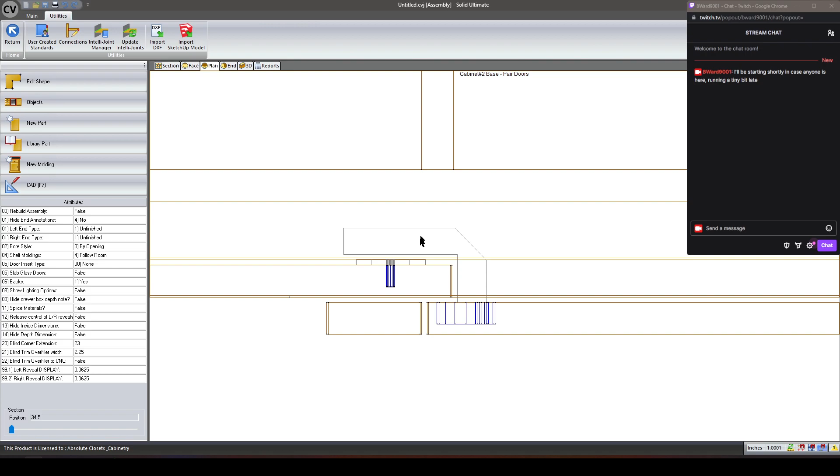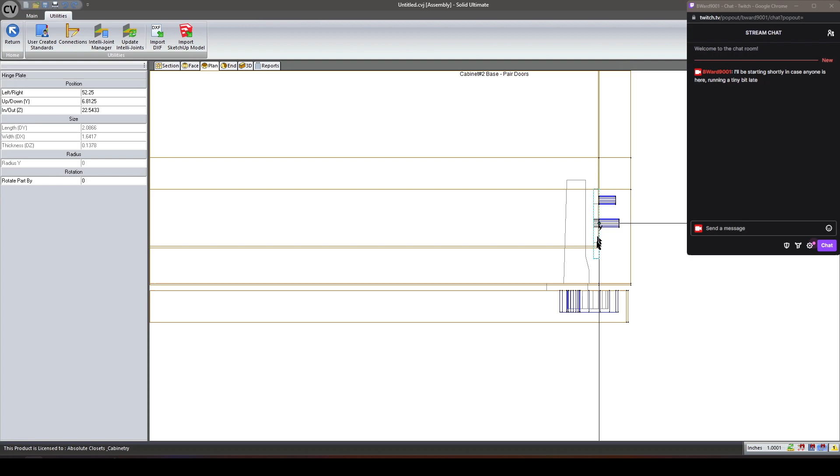And there it goes. So because this hinge plate's door's hinge is one of the blind panel hinge material IDs, this hinge plate disappeared. But you will notice over here, this hinge plate did not, because this hinge plate's door's hinge material ID is not the blind panel hinge. It's kind of complicated, or convoluted, to talk about, but hopefully it makes sense based on what I've been showing so far.

So then if we're making this particular hinge plate go away, that means that we need to add a hinge plate for reports, because the hinge plate that I've got included in my model doesn't report. It's just there, it's just displaying, because all my hinge model is going to report as a hinge. So far as I understand, you can't have other pieces of hardware inside of a hardware model, which is what this would require if it was going to work.

So anyway, at this point, I need to do one more if: this.name is equal to hinge. I might have been able to include it up here, I don't really know. I'm not going to explore that, we're already going a bit long.

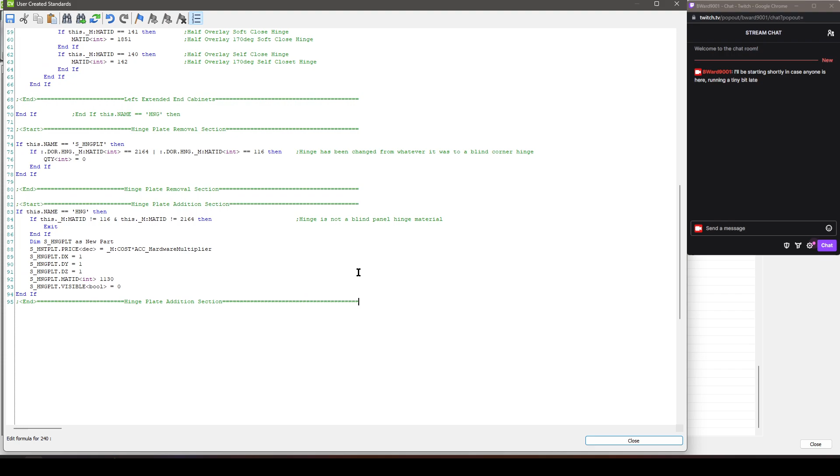So to kind of button this up, and I am a little bit strange about my formatting, so bear with me. I don't really know why I need to do this, but I do. Because if it's all out of whack, I kind of get cranky. So, all right.

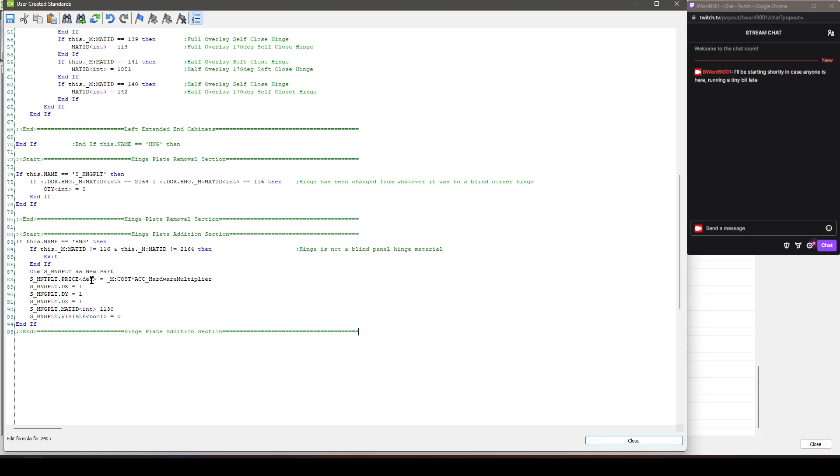This should be it. So we've swapped the hinges depending on the conditions. We don't really care if it's a pair of doors or not. We've eliminated the hinge plate that we don't want because of the way that we built the material model. And we have added the correct hinge plate that we do want for reporting purposes.

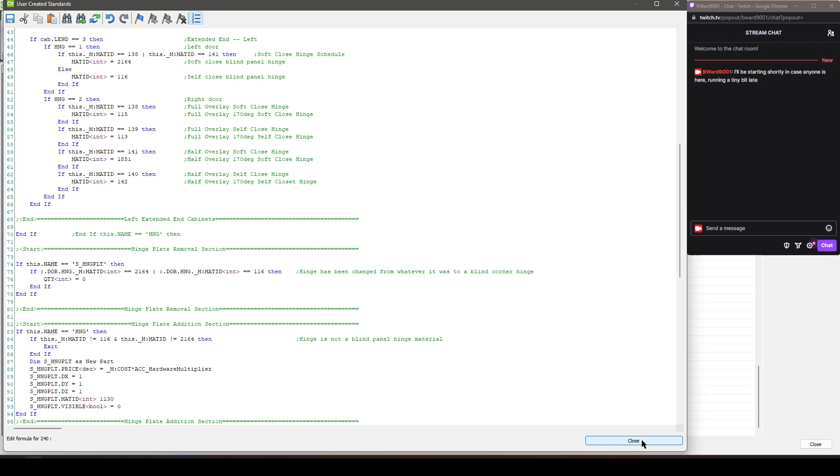What do you know? I have another error. So line 88, something is wrong. HNT. There you go. So typos. Oh my gosh, what's going on here? Helps if you have equals there.

There's a... I'm not even going to say it right, so I won't really repeat it, but there's a programming joke that there are only 3 types of different problems you run into when programming, and they are typos and off by 1 errors. Just sit with that one.

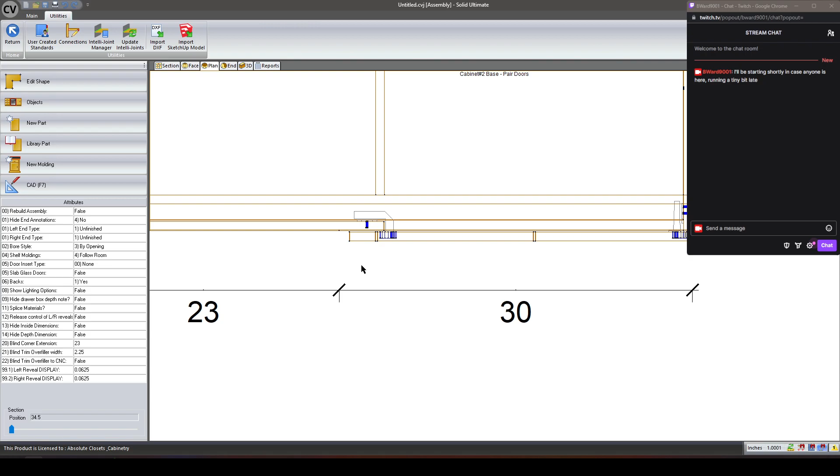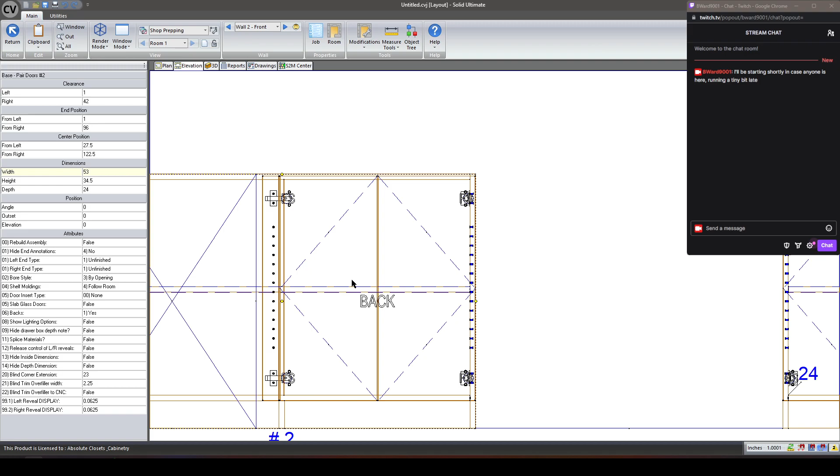Anyway, so we don't get any more errors, and at this point everything seems to be looking correct. My annotations are kind of funky for some reason. I think it's probably because I turned one of my UCSs off or something. It's not switching my annotations right now, but that's not the point of this video. But I do want to delete my cabinets that will not have had their hinges changed. Make sure I only have 1 room. Just rebuild my job real quick and then check my reports.

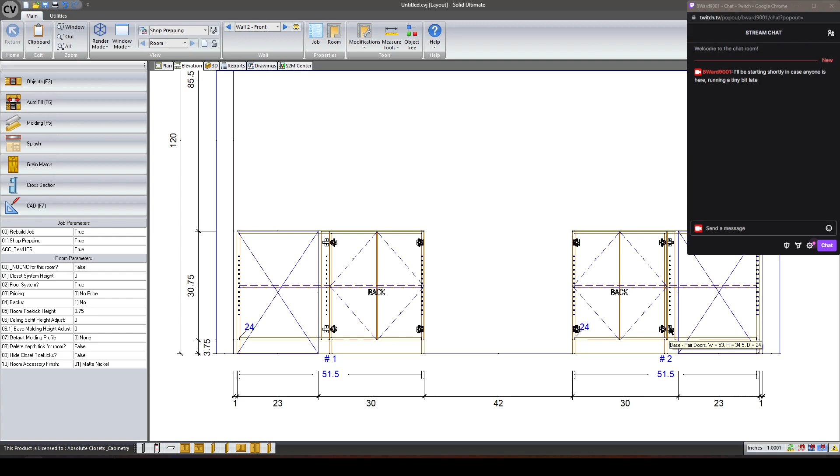So what I should have is 4 170-degree hinges. I should have 4 standard hinge plates. I should have 4 blind panel hinges and 4 blind panel hinge plates, if we've done this correctly. I'm not sure why my reports are chugging so hard today. Sorry for the delays on this.

So there you have it. I've got my 4 0mm hinge plates, which are my standard hinge plates for our full overlay and half overlay hinges and 170-degree hinges. And then I've got 4 3mm offset hinge plates, which are the hinge plates that we use for our blind corner hinges. Got 4 170-degree hinges and 4 blind corner cabinet hinges.

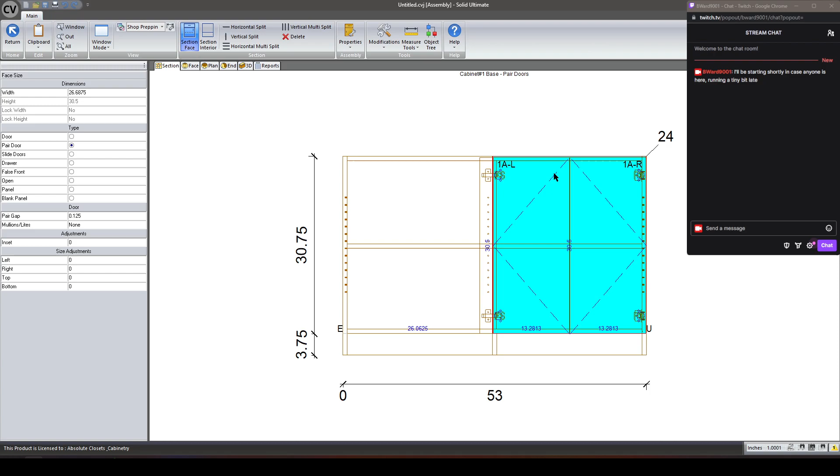So the cool thing about this really is that you don't have to click on your doors and do anything. The hinges and the hinge plates themselves determined, based on the fact that you extended the end of your cabinet, that they needed to change. What really encouraged me to start down this path and build this was: how do you change just the left hinges on a pair of doors? If you change your hinges, it's for everything, because a pair of doors is treated like one sort of entity, if you will.

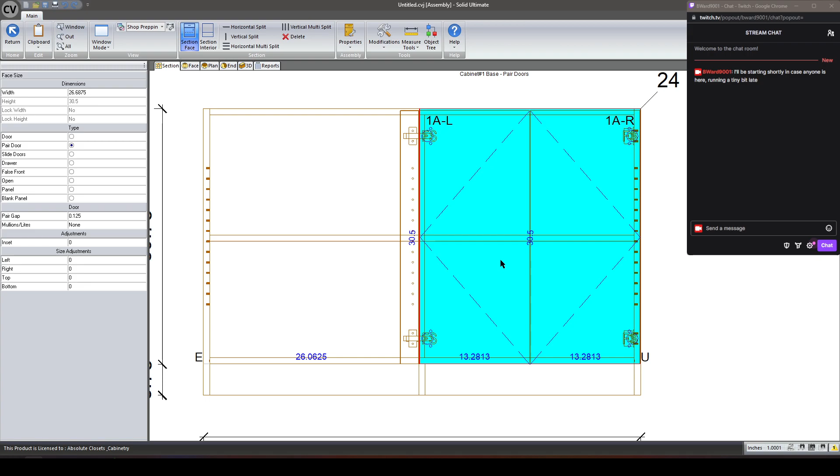And so if you wanted to do this through the section editor and the default tools from Cabinet Vision, you'd have to split your doors and then, I think best practice, equalize the width on them so that they still function as a pair of doors. And then you have to change this door's hinges to be the blind panel and this door's hinges to be the 170 degrees. And that's not hard to do.

I'm aware of that. I know it's not hard to do, but we are trying to find different ways to speed ourselves up just a little bit more as we're processing our work while eliminating the possibility of errors and making sure that we get our hardware reports and our drawings set up exactly correct. This is one of those things that helps you get more done. It doesn't really let you turn your brain off, as I hear some people talk about. We're not doing this to allow people to stop thinking.

We are doing this to free their minds up and allow them to stop worrying about these stupid little things that we can automate and build solutions for, and instead free the human mind to work on the things that only human minds can work on, which is coming up with better ways to do what we do, finding safer ways to do what we do, or whatever types of things that a program will most likely not be able to do in our lives. It's to free our minds up to do that.